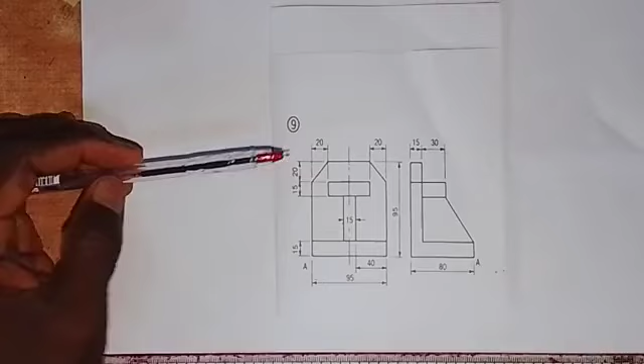Here we are still working on the conversion of orthographic views into isometric view, and here we have these orthographic views given in first angle projection, because this is the front elevation and we have this to be left end elevation. In the front elevation we have that distance from here to here is 90 millimeters, and from here to this where we have this line is 40 millimeters. Okay, this is 95 millimeters, sorry.

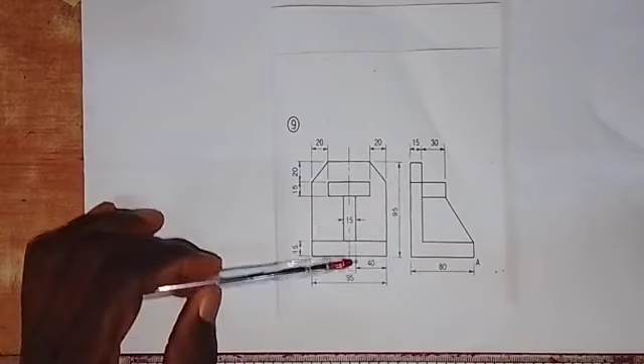Okay, so from here to here is 40, and thickness from here to here is 15, and we have that from here to here is 95, and then from here to here is 15, from here to here is 15, that is for this. From here to here is 20, from here to here is 20, from here to here is 20. In the end elevation we have that from here to here is 80, and then the thickness is 15 for this, and from here to here is 30.

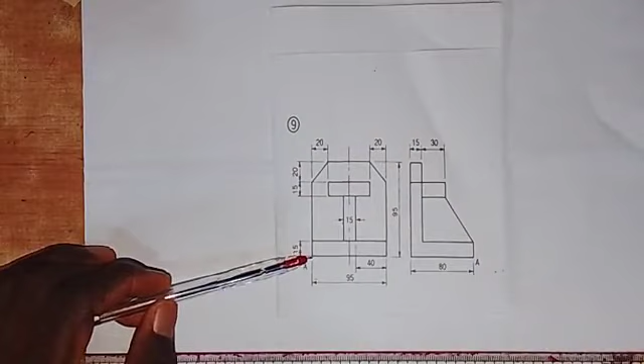Alright, so the lowest point is indicated here with letter A, and we also have it here in the left end elevation. So we are going to put these two parts together to obtain the isometric view of this object. So what I'm going to do is produce this L shape of the left end elevation first. Then from there we carry on and get the other part of the object.

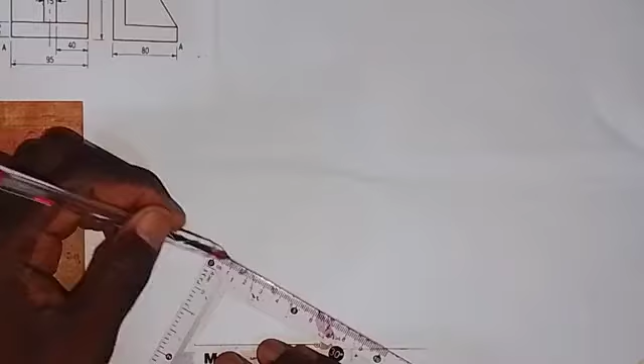So let's start. I'm going to draw a short horizontal line here, and then I will take my 30-degree set square, laying it here. Okay, so I'm going to draw a line in this direction here. Then I will come to this point here and draw a short vertical line at this point. This is where we have the lowest point. I will call it point A, so we need to indicate the lowest point here.

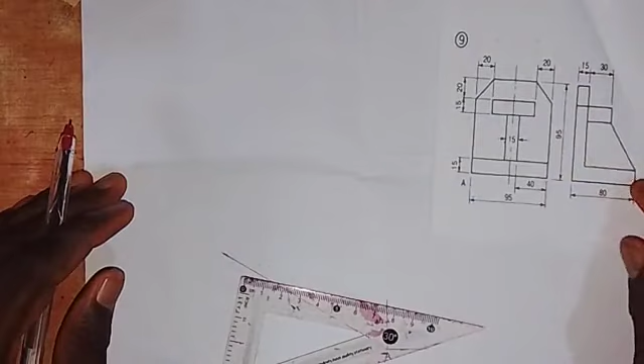So the next thing that I'm going to do is that this 80 millimeters that we have from here to here, we take it on this side. So this is 80 millimeters here. Then at this point, this 15 from here to here, which is shown here in the front elevation, I will take 15 millimeters up. So this is 15 millimeters here.

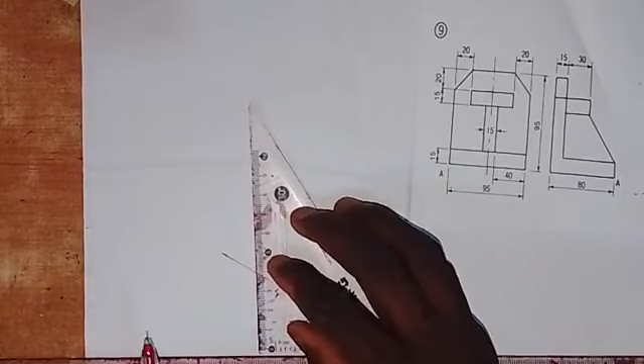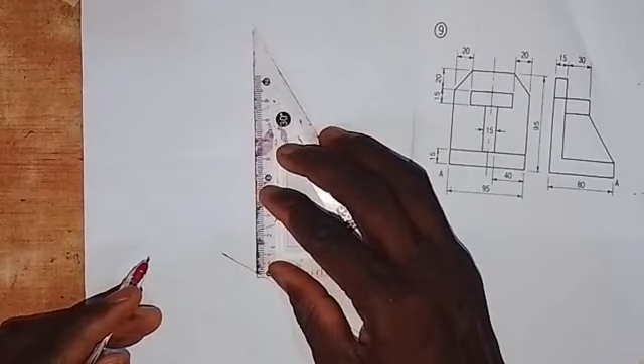So I will come to this point and draw a vertical line. It goes up like this, so I need to extend it, because that vertical line that we have there is 95 millimeters. From here to here is 95 millimeters as shown in the front elevation. So I'm going to take a measurement of 95 millimeters from here up. So this is 95 millimeters here.

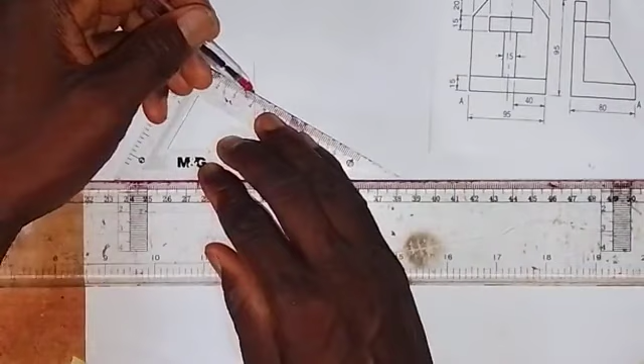All right, so having taken this 95 millimeters, I'm going to come up here and draw just a short line in this direction that can give us this 15 that we have here. So I'm going to take a measurement of 15 millimeters here. So here is 15 millimeters. At this point here, I will draw a vertical line down here like this.

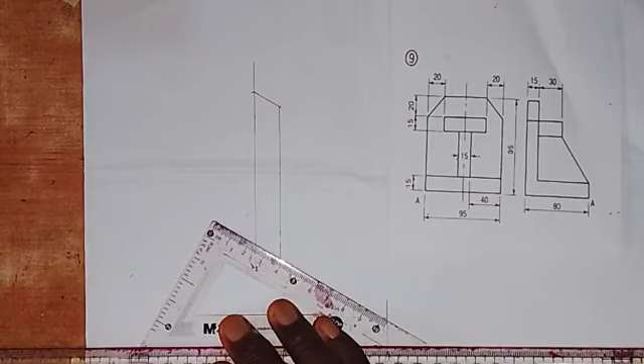So this 15 millimeters, I will join it together with this point here. So we have this now. You can see that we have brought out the L shape of the front elevation. Having done this, the next thing we are going to do is to work on how we can make it a complete block, because this is an isometric view of this L shape that we have in the orthographic view. So what we have to do is this.

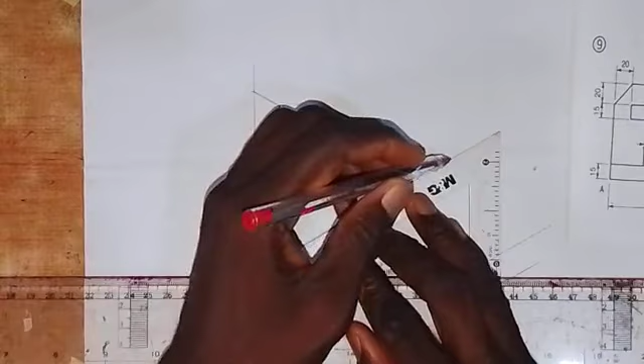We take the set square, and then we are going to draw a line from this point here in this direction. Then we come to this point and also draw a line from this point in this direction. Then we come to this point and we draw a line in this direction. Then we come up here and also draw a line in this direction. Then we come there and draw a line in this direction.

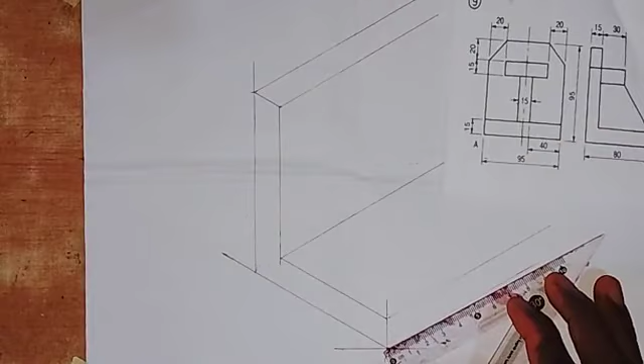Alright, so then coming down here, we are going to take a measurement of 95 millimeters, as we had that from here to here is 95 millimeters. So from this point we take 95 millimeters. So this is 95 here. What we are going to do now is draw a vertical line from here up to touch this line.

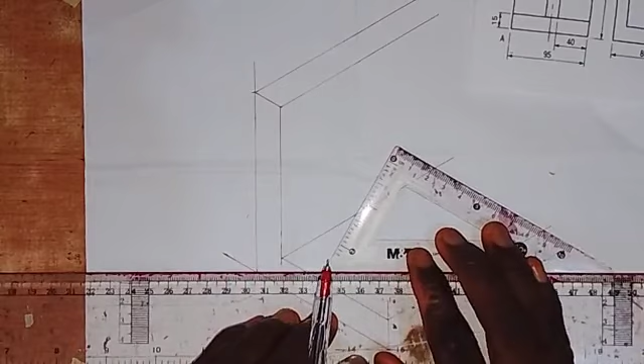And then from here, we draw a line. From this point, we draw a line to touch this, okay? And then we draw a line from this point.

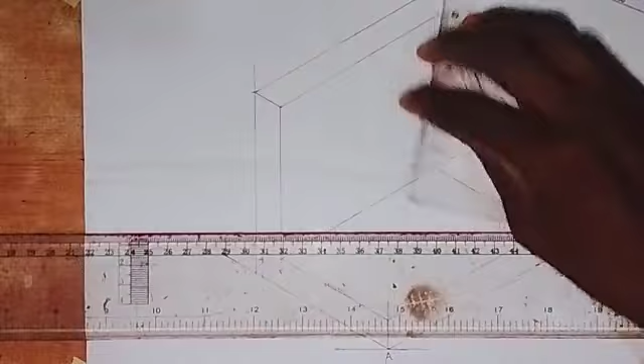From this point, we draw a line up here like this. And then we come to this point also. We draw a line from this point to touch this line. So we have this now. Okay, so we now need to put these features. We need to put them here.

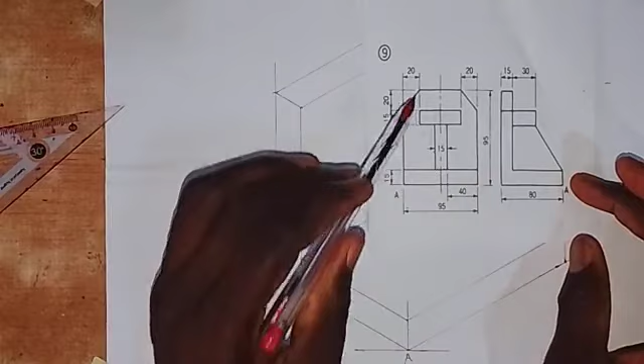Okay, so what we are going to do is this, as you can see here. For this web that we have here, its thickness is 15. Then we have to take 40 from here to here. I will also take 40 from here to here. But let's work on this part first, as we have that from here to here is 20 and from here to here is 20.

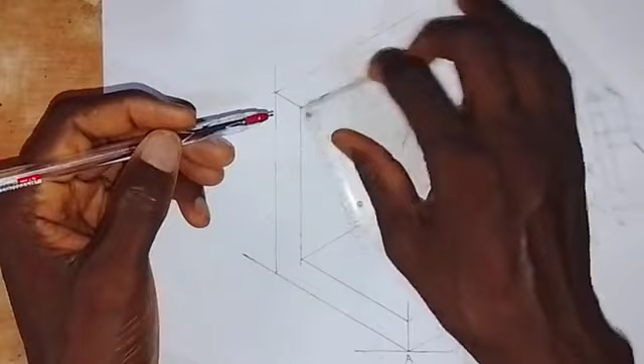So we take 20, so we come onto this line. We take 20 down. Then we come to this side. We also take 20 from here to here. So we are going to join these 2 points together like this. All right, so then we also come to this side.

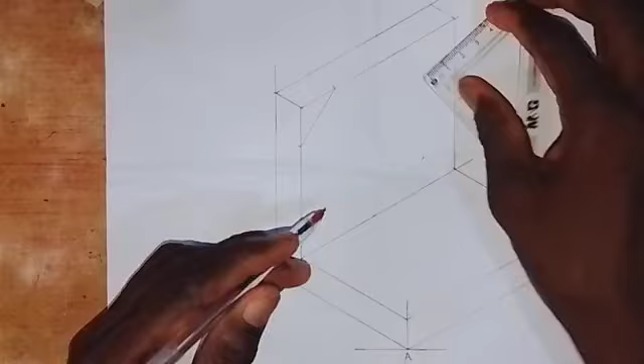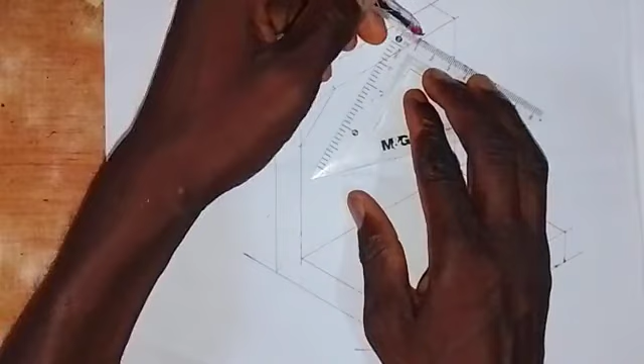We take 20 again. So we take 20 from here. So this is 20. Here we have 20, and on this line we take 20 from here down. This is 20, and then we join these 2 points together like this, and then I will now take the 30-degree set square.

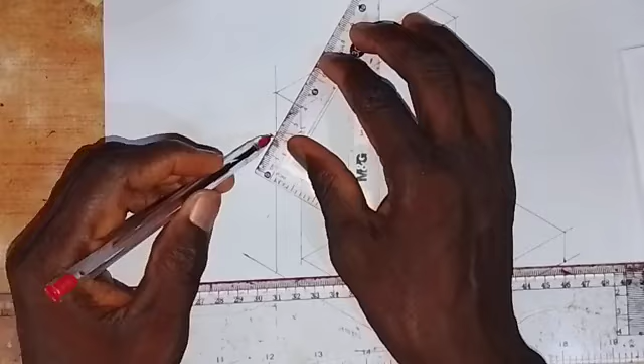So take the 30-degree set square. I'm going to draw this line from here to here. Then we come up here. We also draw a line from this point here like this, and then we join these 2 points together like this. So we have this like this. Then coming up here, we also draw a line from here to touch this. So that is what we are going to have there.

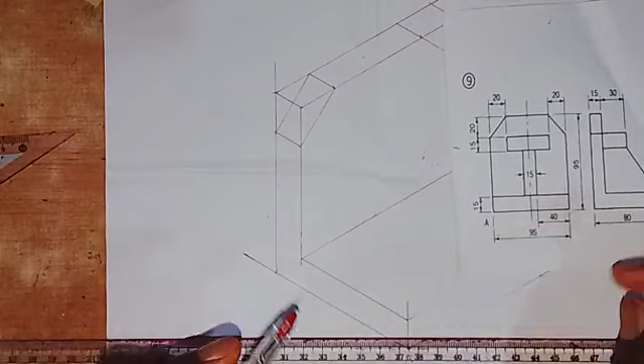So we have produced this feature that we have up here for this block, and now we need to work on this web. As we have here, we need to take this 15 from this point here. We take 15 millimeters down. What we have from here to here is 95, and we already have from here to here to be 20, and from here to here is 20, so that's 40 from 95, that gives us 55. It means that from here to here is 55 millimeters.

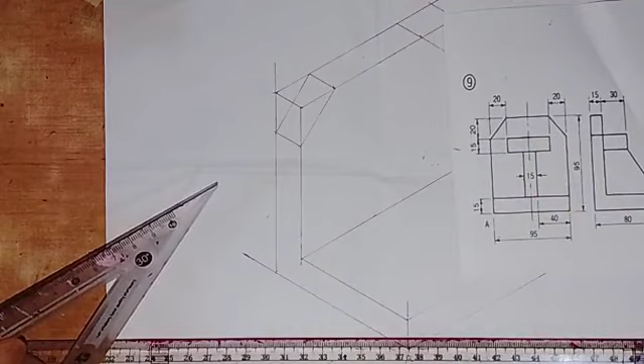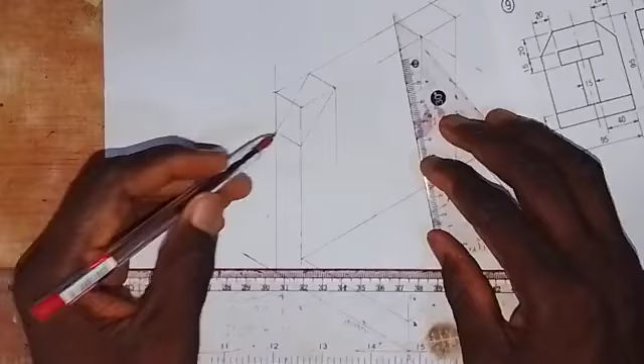So even without taking it, you can see that this line is in line with this, and this also is in line with this. So all I have to do is to come to this point here and draw a vertical line down here, and then coming to this point here, I will also draw a vertical line down. Then I'm going to draw a line. I will not draw the line completely, because this line that we have here is in line with this line. So I just come to this point here and draw a line from here to here.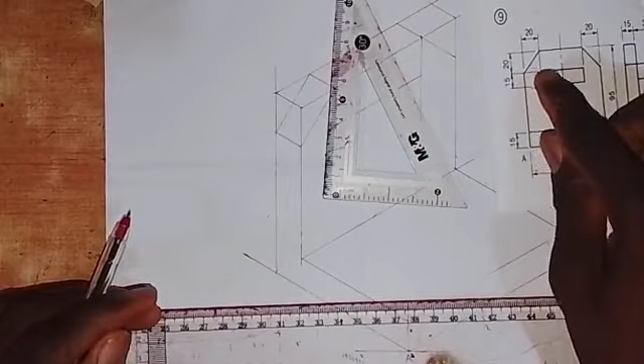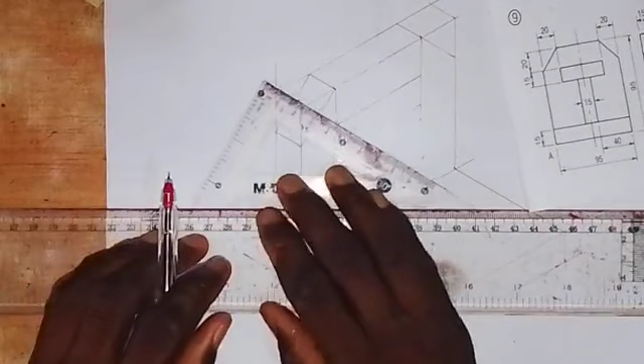Then I will now take 15 down, as the thickness from here to here is 15. So coming to this point, this is 15 millimeters. So I'm going to draw a line from this point. I don't need to draw a shaft. Then I'm going to transfer this. So this will go forward like this, and then I'll come here and also draw this line forward like this.

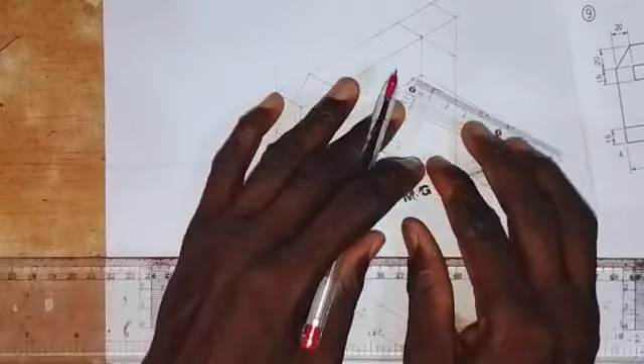Okay, so we take a measurement. I need to extend this like this. We take a measurement of 30 millimeters. From here to here is 30 millimeters; that is the length of this part. So we take 30 millimeters forward. Here we have 30 millimeters. So I'm going to transfer this point here like this.

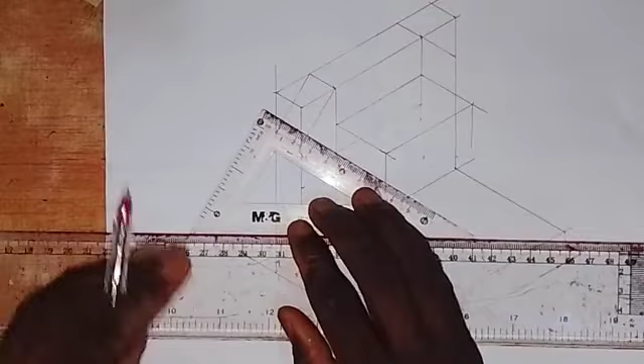Then coming to this point here, I will take a vertical line down here, and here also I will take a vertical line down. This 15 that we have taken here, I'm going to transfer it here, joining it with this line, and I will also transfer this one here like this. So we have produced the shape that we have here now. What we have to do now is come to this line here. On this line, from this point, I will take a measurement of 40, and then coming to this end.

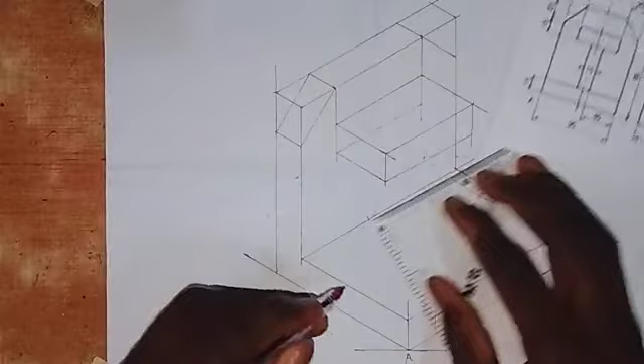So the reason why I'm taking 40 is that we are shown here that from here to here is 40, and from here to here will also be 40, okay. So I will come to this side here and also take a measurement of 40 millimeters, okay. So we have this now.

So what I'm going to do now is that if you look at the web, it starts from here and stops on this line. So all I have to do is to draw a line. I'm going to make it a thick line at once by drawing the line from this point, and it goes like this to touch this line, okay.

For this one, I'm not going to draw it. I'll just mark this point, mark it here like this, okay. So I will come to this point here, and draw a vertical line like this to make it a thick line at once, okay.

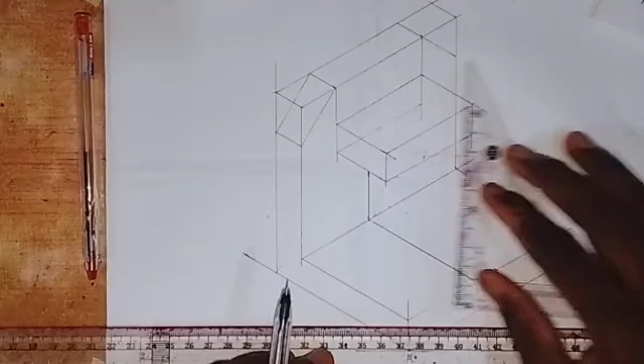Then I need to come to the middle of this, okay. You can see the thickness of the web is in the middle of this. So I need to come to the center of this. As you know, from this one is 55, oh sorry, okay. So we have this.

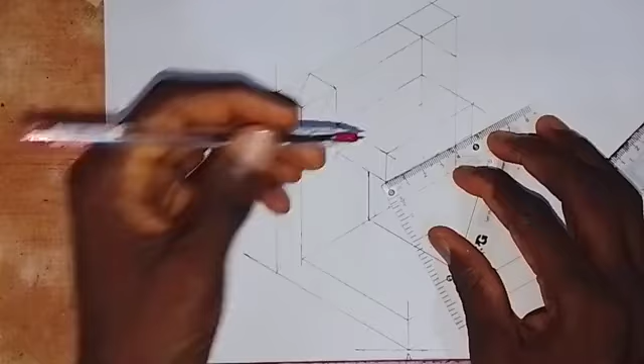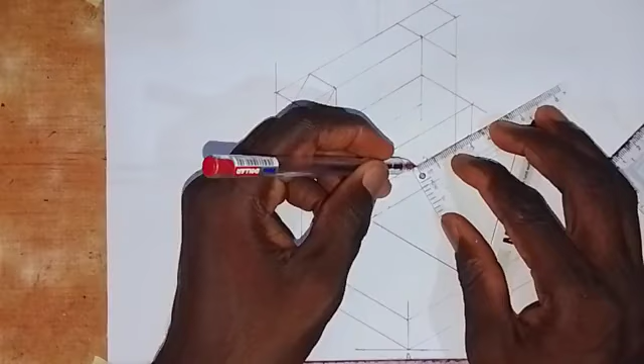All right, so what I'm seeing here is 15. Okay, so I'll just break it to 2. Then that 15 we have, that is 7.5. So the 7.5, I'll just mark it here, and then this makes it 15, okay. I'm looking at this distance.

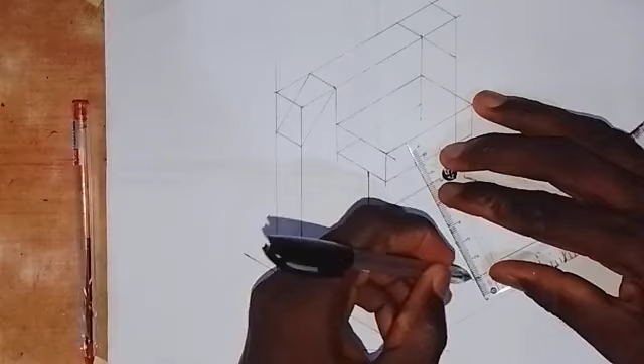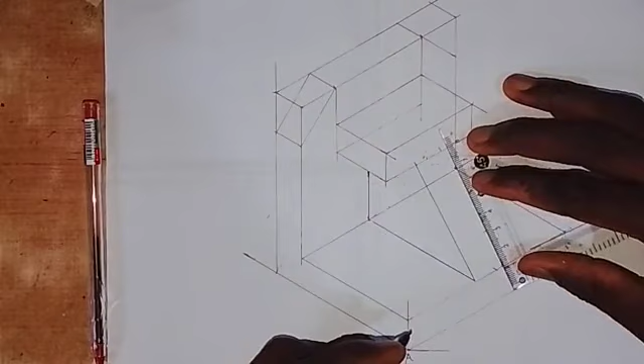Okay, so I'll join these 2 points together. Then I'll also join these 2 points together like this. What do we have here? It should be 15. This is less than 15. It should be 15, so this is 15 here, okay. So I'll join these 2 points together like this. So this is what we have.

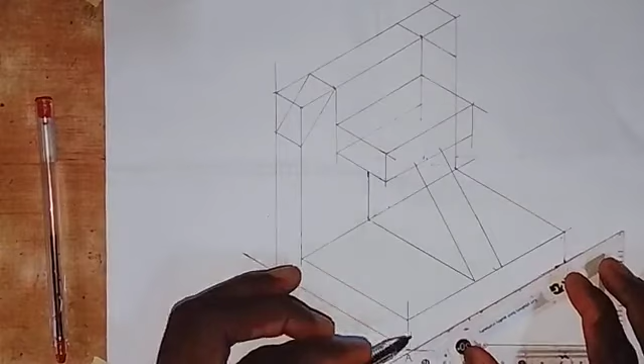All right, so we have this now, and we have completed the object. So what we just need to do is to bring out the visible outlines and edges. This line should be made a thick line like this, and this line too should be made a thick line from here to here, okay.

Then make this a thick line from here to here, and coming here, also make this a thick line from here to here, and this also, and then we also make this a thick line. Coming to this point here, we have to make this a thick line from here to here, and then this line also should be made a thick line.

All right, so then let's work on the vertical. From this point down, we make it a thick line, and also make this a thick line from here to here. Then this short line should be made a thick line, and this line also. So this line should be made a thick line, and this short line should be made a thick line from here to here. All right, so we have this now.

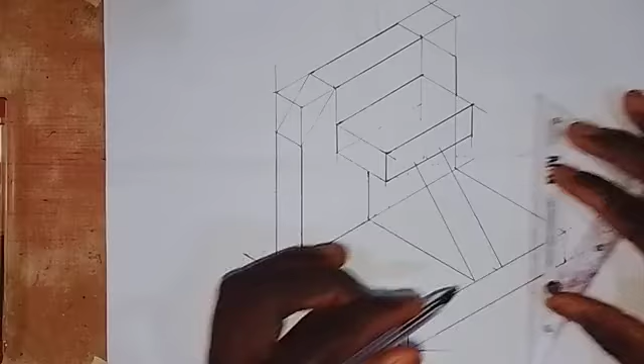So other ones that we have, this line should be made a thick line. Coming to this side here, we are going to make it a thick line, and this also from here to this end, and here also make this line a thick line. Then there's a vertical line here that we need to make a thick line.

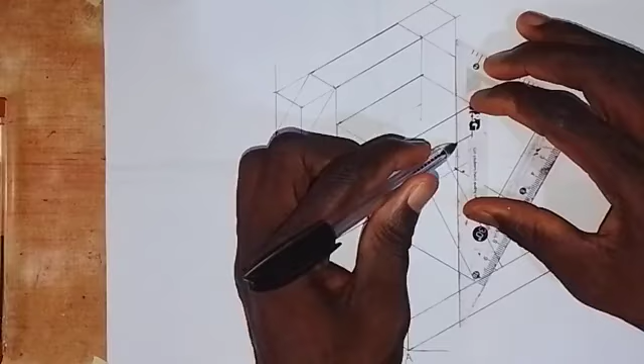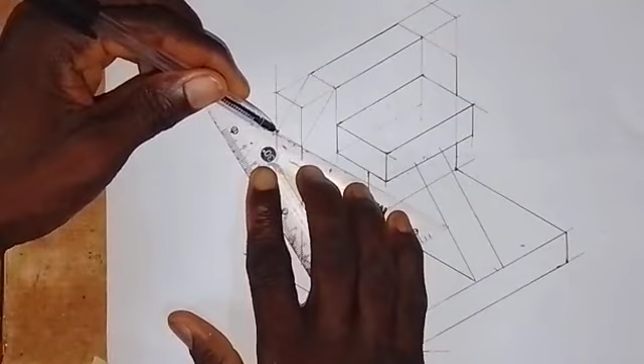Okay, so other things that we have here, this line, let me make it more visible as we have it here. This line also, let's make it more visible. Then for this one, make it a thick line from here to here, and this also. This line should be made a thick line, and this line, and then we also make this a thick line, and this should also be made a thick line from here to here.

All right, so this line is a non-isometric line, so let's make it more visible, and then we also make this a thick line. Then this line should be made a thick line from here to this end. Okay, so we have completed the isometric view whose orthographic views are given as we have here. It's as simple as I've done it here.

All you have to do is to practice. When you practice, you become a master at this work.